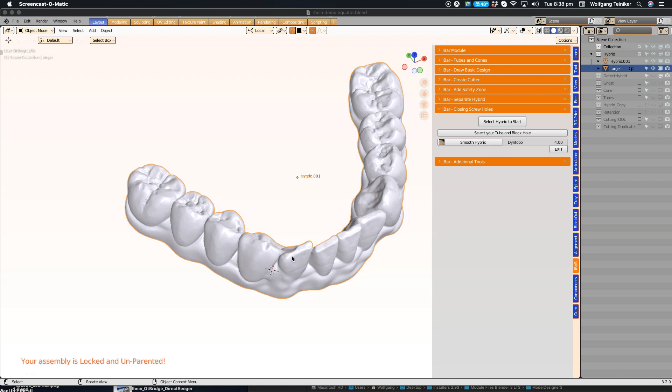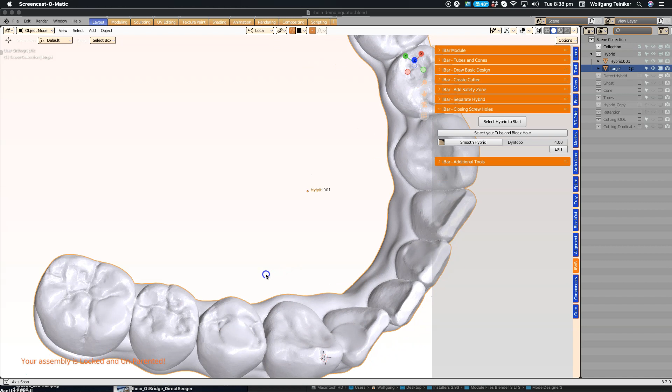In this short video I will demonstrate how to use the Rhein 83 OT Equator attachments, and I'll be placing those into my iBar. So the hybrid has already got the screw canals sealed, and I use this part of the submenu to do this. Next we'll enter into the component module and access the iBar assembly parts. I'll append those into the scene.

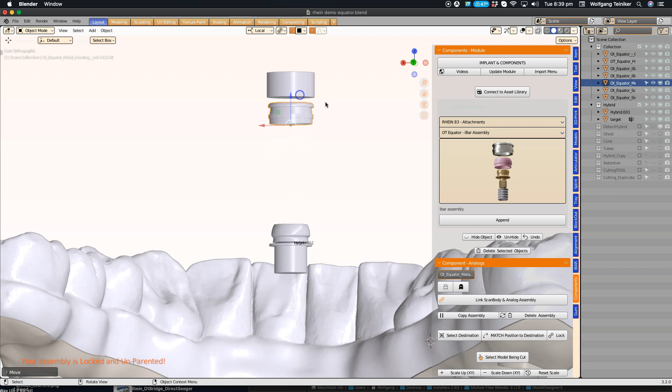The assembly consists of an upper cylinder. This is used as a cutting tool to cut a cavity on the inside of the hybrid. We have the stainless steel housing, which you can see on the right hand side. This will be glued into the cavity. Then we have the retentive sleeves. These are color coded and will fit into the stainless steel housing.

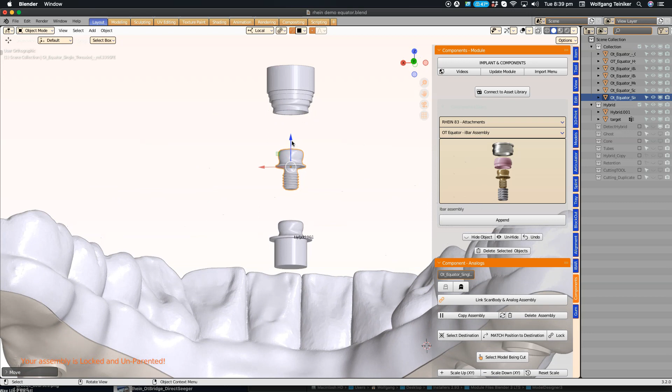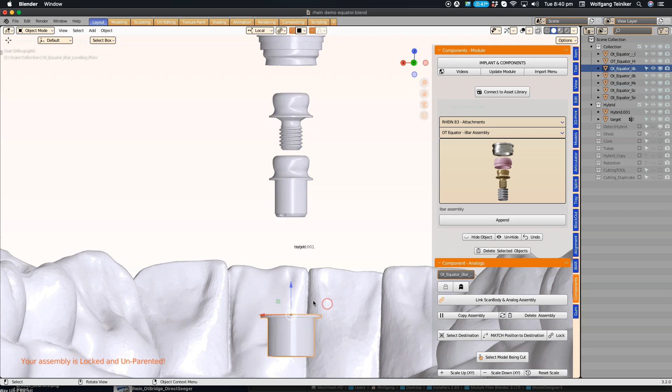We then have the OT Equator component. This gets screwed into the bar. This has its own cutting tool, and you can see the cylinder on the bottom. This makes the hole on the inside of the bar. And then we've got a screw thread which will be cemented into the hole that we're going to be making in the bar. And then finally there's another little cylinder. This acts as a level plateau onto which all of these parts can sit.

Having said that, if this part is too big and the bar is running too narrow in some areas, then we would only use the actual component together with its cutting tool. So I'll just go back, Control Z.

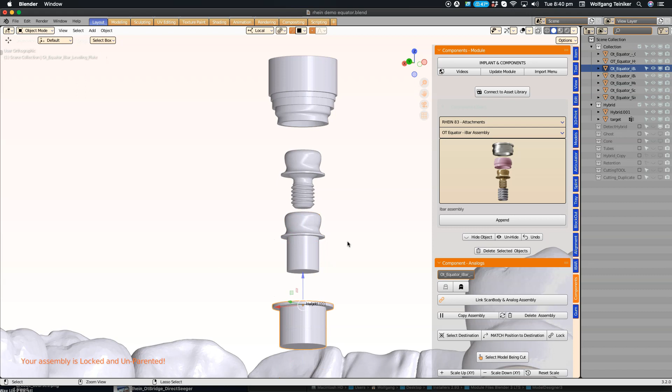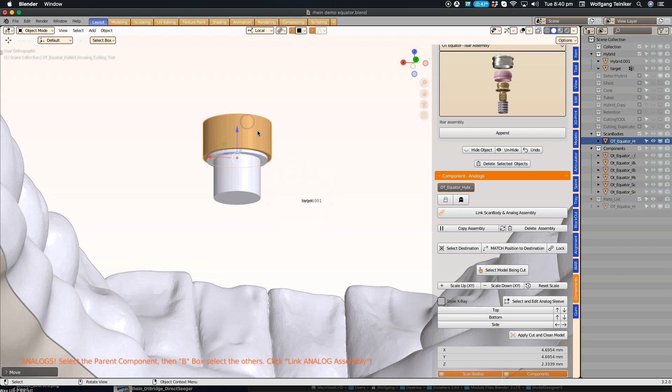We will access the component module, go into transparent mode, select the uppermost cylinder, use the B key, box select all the other parts, and then link. So this parents all the parts to the upper cylinder. Now I can use the G key and safely drag that around the scene. Let us copy that.

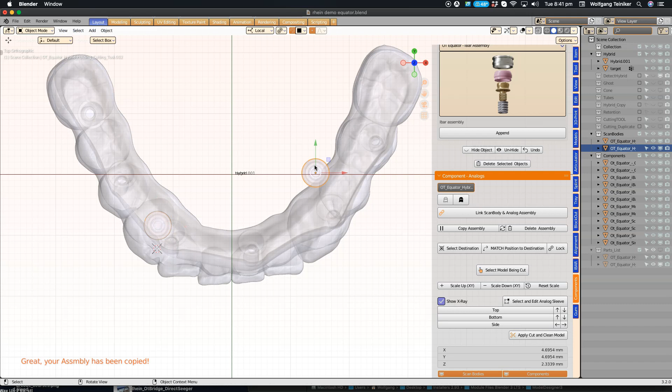Now the best way to do that is to view the case from the top, and I'll select one of those and go into transparent mode, and then I'll use the G key and I'll position it somewhere on the bar. Same thing here, we will just position it somewhere on the bar. Next, look at the case from the front. I will choose my hybrid and hide it for the time being. We can go out of transparent mode.

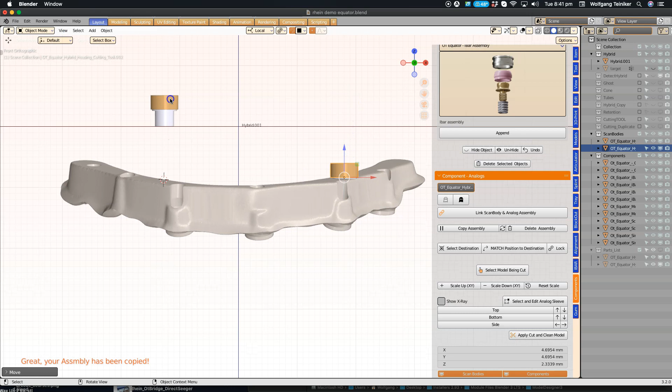Next, select the yellow part. I'm going to just drop those down like this. Same thing with this one. Looking at it from the top again, I want to make sure that I can get this into a fairly broad part of the bar using the G key. Having said that, we don't want to drag it into our screw chamber there. So just back a little bit.

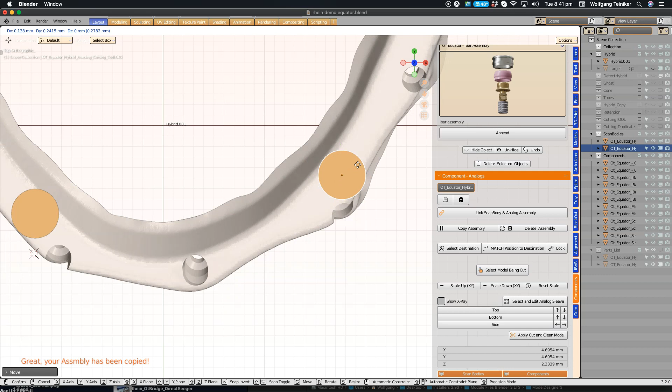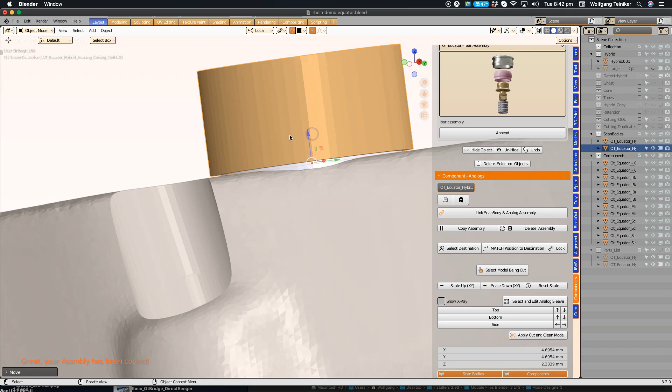Now this comprises of using the R key for rotate, using the arrows or the G key and the R key. So we're positioning this level plate on the surface of the bar, but we do not want to submerge it below the surface. So keep a small gap like this. This would be okay. We could maybe just rotate it a little bit. So just spend some time to fine tune this, because we don't want to have a big step from the bar onto this kind of plateau.

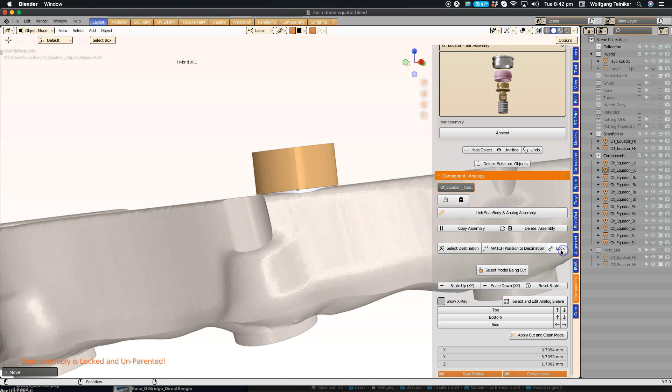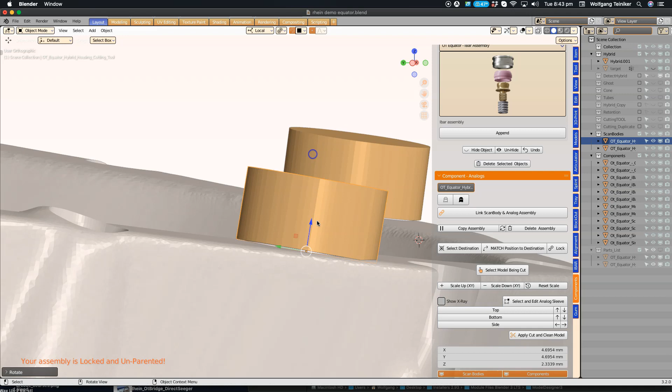Once you're happy with that, press lock. That gets rid of the parent group. So we'll do the same here. I'll zoom in and again use the R key, the G key. Whoops, I'm going to make sure that part is selected. R key and G key. Just a combination of using the arrows here.

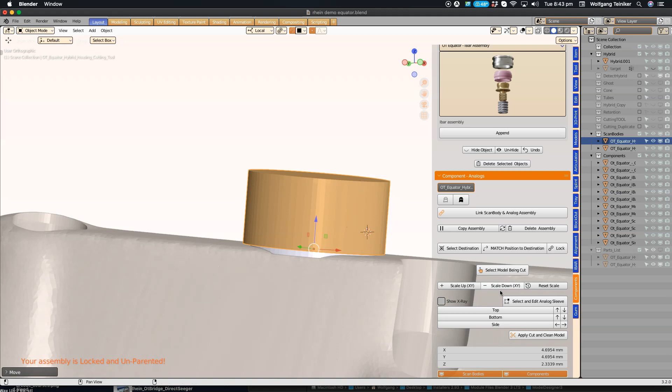So notice how the bar is running a little bit too narrow, which is okay for this demonstration because we don't want to use a level plate on this particular one. With this one being selected, push lock. This removes the parent group.

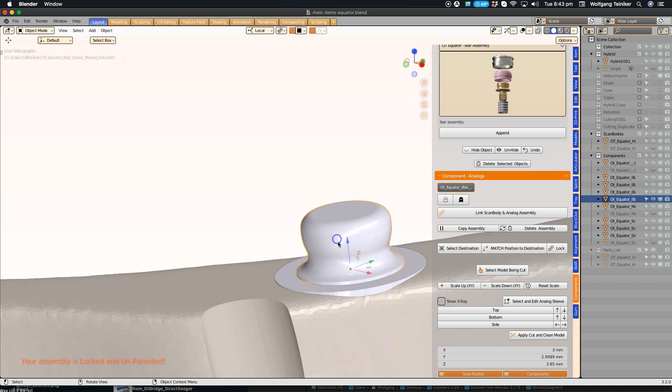We'll go to this one. I'm going to hide all the parts we don't need. Press H. This is the one we need. And the one with the screw thread, I'm going to hide that. Keep this one, keep that one. Now with the plateau, the cylinder being selected, and only this one, shift and left click on the bar as well, edit and create a union.

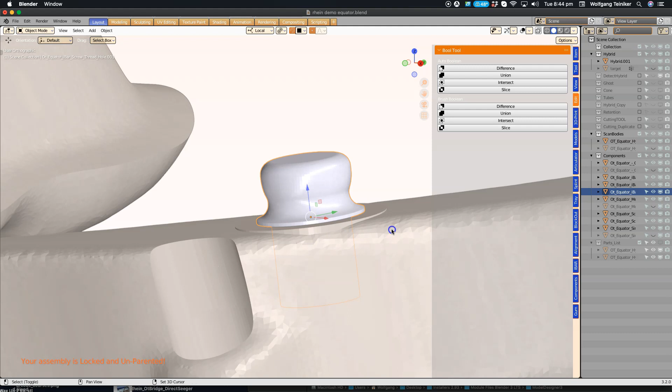Select the cutting tool, shift and left click on the bar as well and create a difference. It's made the hole. The screw thread is already in there because it's not hidden, and you can see how this just gets cemented into that hole. Now if you like, you could leave it like this.

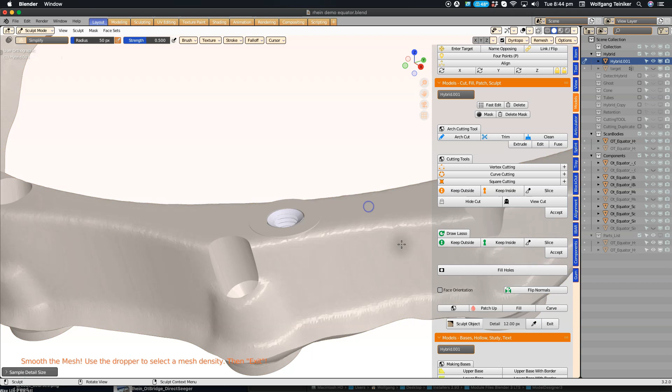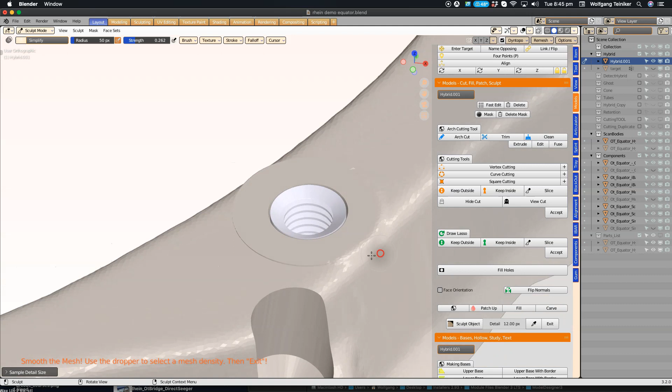Alternatively, you can go to the Model Designer menu and then access the Sculpt tool here. Use a dropper because we might want to mimic the mesh of the surrounding area, and just set the strength really low. You can also set the dyntopo here fairly high, so we can just get a very smooth transition between this plateau and the upper surface of the bar, like this. Just breaking the hard edge. We can leave it like this. Exit. So this one's already done.

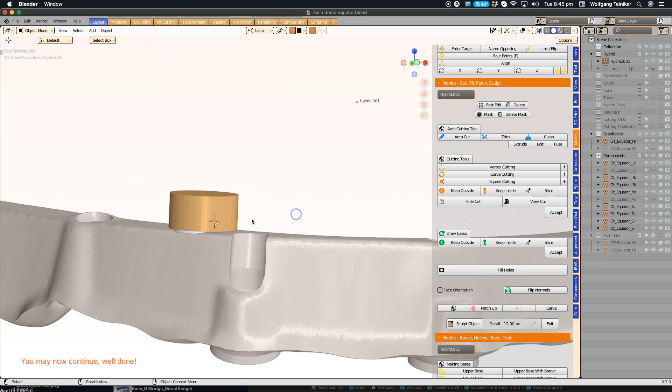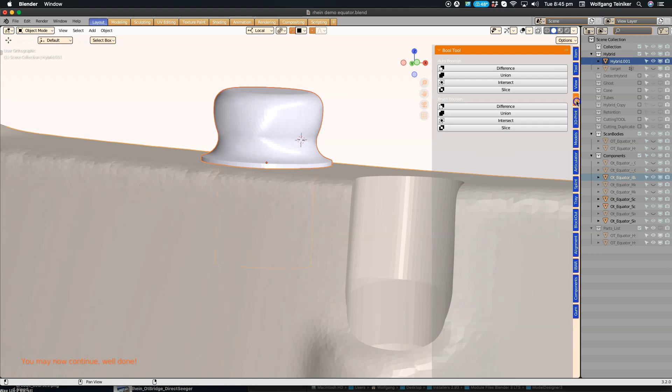Next we'll move to this one. I'm going to hide this yellow part, hide all the components we don't want. In actual fact, the plateau, I'm going to delete it, X delete. Make sure this one I can hide, only use the cutting tool. Again, with this being selected, shift left click on the bar as well, edit and create a difference. That's created the hole, and we can see we've got our little insert there. Control Z, I can unhide it.

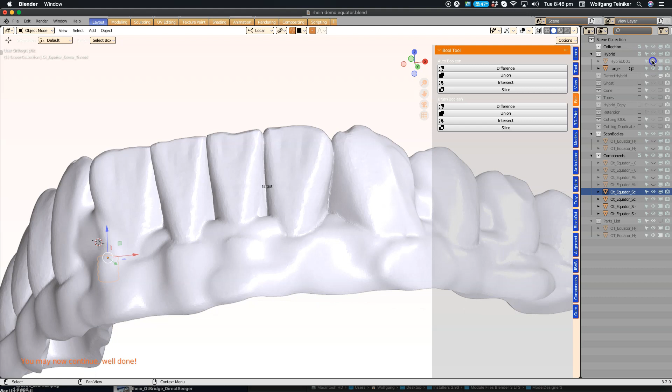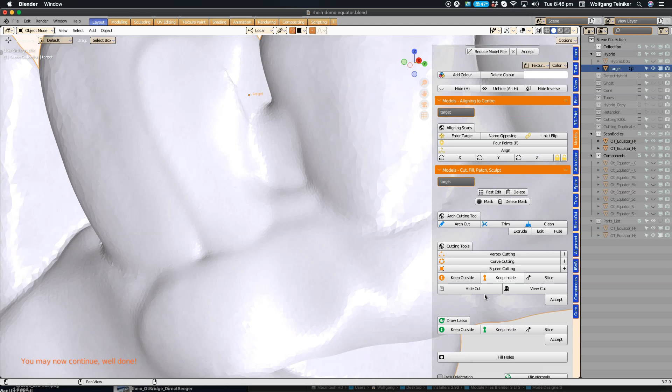Next, I'm going to focus my attention on the hybrid, so we can hide the bar. I'm going to hide all these associated parts, and we will unhide the cylinders here. Now if you at any stage see the cylinder popping out or through the interproximal areas here, you can use in the Model Designer the patch up tool. You can overlay some extra mesh here.

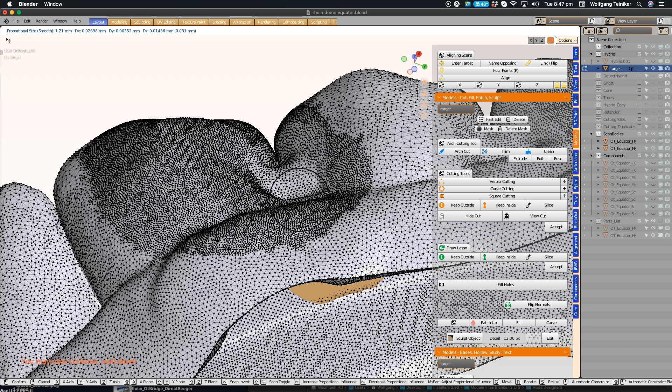You can also tab into edit mode, select a vertex like this. Make sure you are in proportional editing, and then very careful with the G key, set the circle extremely small, because at no stage do we want to affect the inner surface of the hybrid. So tab out, and then we could smooth that over. But for this example, we'll keep it like this.

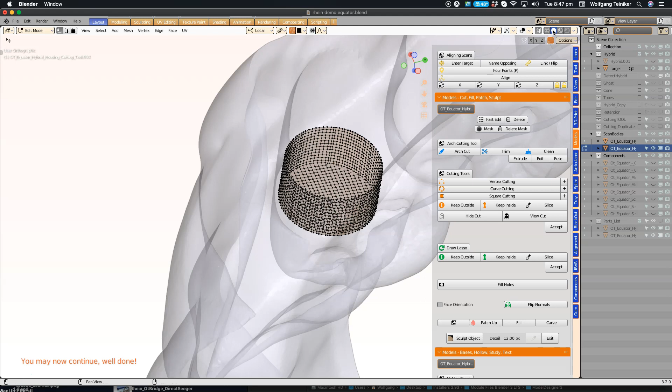Now we're going to select the cutting tool, tab into edit mode, and you will notice that the cutting tool is designed in a way that it's got many vertices running around it, but on the upper surface we've got only one face. So go into face select, select the actual face, use the E key and pull it upwards. Tab again out of the edit mode. With the cylinder being selected, shift left click on the hybrid, push Edit and create a difference.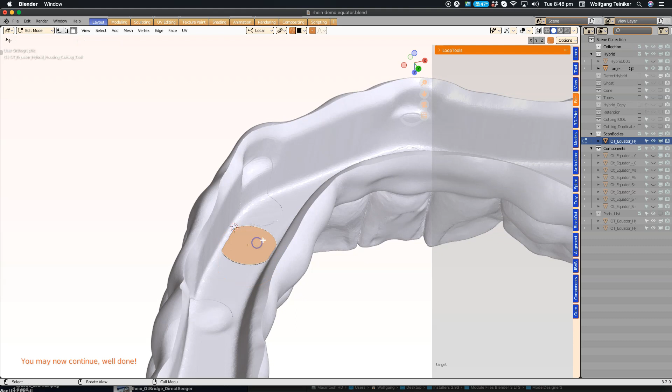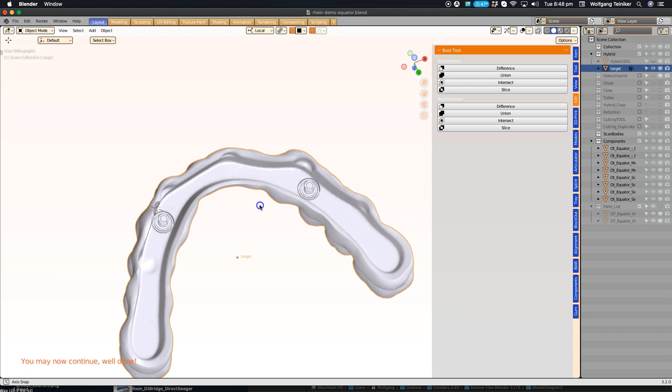Let's do the same for this one. Select it, tab into edit mode, select the top face, E, pull it up, tab out, shift left click on the hybrid as well, create a difference. Excellent. So we can insert our stainless steel housings and all the other parts that go with it, and we can unhide that, and we can view our work.

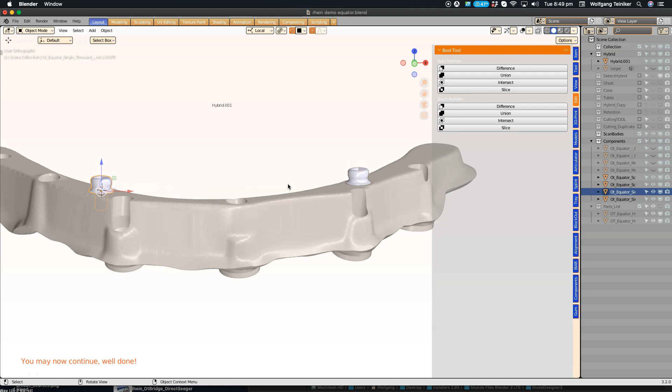Here we've got the nylon sleeves. We can hide those. So those were the stainless steel housings, the nylon sleeves, and these parts that get screwed in. So to export it, you only export the bar, and then you would glue in the little screw threads. Excellent, that completes it, and I hope you enjoyed watching the video.